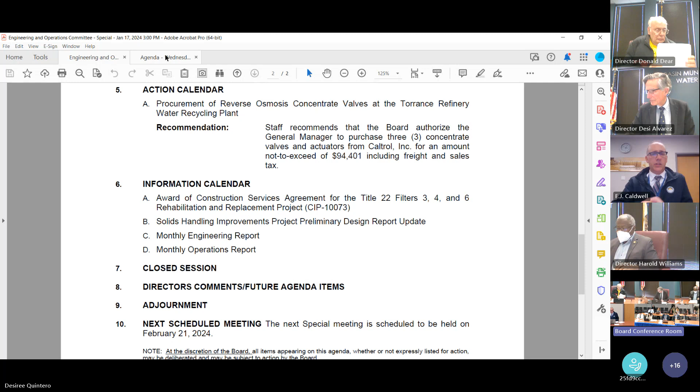So, Mr. General Manager, would you like to introduce that item? This first item begins on packet page 3, and for this presentation, we have Jason Cohn, our Operations Analyst 2. Thanks, EJ. Good afternoon, directors. You may turn to page 3 of your packet if you'd like.

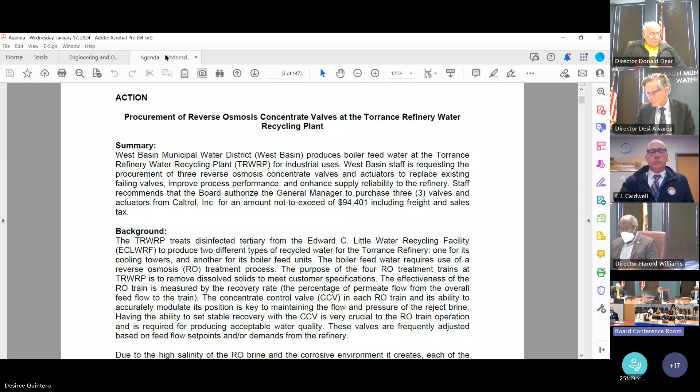The Torrance Refinery Water Recycling Plant treats the disinfected tertiary effluent to produce 2 types of recycled water for the Torrance Refinery: one for their cooling towers and another for their boiler feed units. The boiler feed water requires use of a reverse osmosis treatment process, and the purpose of the 4 treatment trains that compose that process at Torrance is to remove dissolved solids to meet customer specifications. The effectiveness of the RO train is measured by the recovery rate, the percentage of permeate flow to the overall feed flow to the train.

The concentrate control valve (CCV) in each RO train, and its ability to accurately modulate positions between 0 to 100%, is key to maintaining the flow and pressure of the reject brine. Having the ability to set stable recovery with the CCV is integral to RO operation and is required for producing acceptable water quality, various set points based on refinery demand, and the regular cleaning process of the RO trains.

Due to the high salinity of the brine and the corrosive environment it creates, each of the 4 concentrate valves and its accompanying actuators are extensively corroded. The CCV of RO Train 2 failed towards the end of September 2023, and without it, the RO train is inoperable. With RO Train 2 offline, operators are unable to perform proper cleaning of the remaining RO membranes, which in turn impacts product water quality.

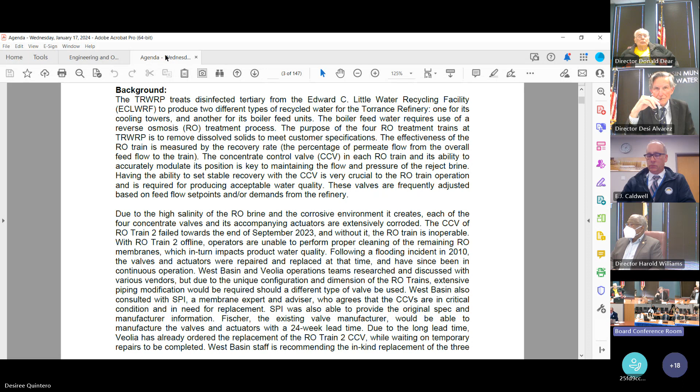Following a flooding incident in 2010, the valves and actuators were repaired and replaced at that time and have since been in continuous operation. West Basin and Veolia teams researched and discussed with various vendors utilizing a different type of valve than the existing one, but due to the unique configuration and dimension of the RO trains, extensive piping modification was required for that. West Basin also consulted with SPI, our RO membrane experts, who agree that the CCVs are in critical condition and in need of replacement. They were also able to provide the original spec and manufacturing information.

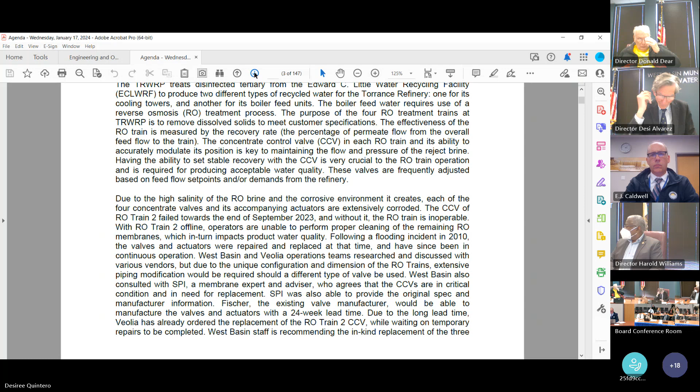Fisher, the existing valve and actuator OEM, would be able to manufacture them with a 24-week lead time. Because of that, Veolia has already ordered the replacement of the RO Train 2 CCV while waiting for temporary repairs to be completed in the meantime. West Basin staff is recommending the in-kind replacement of the 3 other concentrate valves to mitigate the risk of production loss and inability to meet contractual demands. In-kind replacement will facilitate a quick and efficient changeout and will remove the need for pipe reconfiguration and ancillary purchases.

Staff solicited a quote from Caltrol Inc., the only distributor of Fisher valves, included as Attachment A on page 6 of your packet. The total cost of 3 Fisher sliding stem valves and actuators is $94,401. Because Caltrol Inc. is the exclusive independent representative for Fisher products, sole source procurement is recommended per the West Basin Administrative Code, section 5-2.103, subsection F2. The sole source letter from Caltrol is included as Attachment B, packet page 13.

And with that, I'd like to read the recommendation and answer any questions you have after: staff recommends that the board authorize the general manager to purchase 3 concentrate valves and actuators from Caltrol Inc. for an amount not to exceed $94,401, including freight and sales tax.

Thank you. That concludes the report. Director Williams, do you have any questions? I'll have a question for the general manager.

Is there any other option? We believe that this is the best option, and it's important to note that it's clearly stated in the fiscal impact in the report that under the new Torrance Refinery agreement, funds for this have been secured. Thank you.

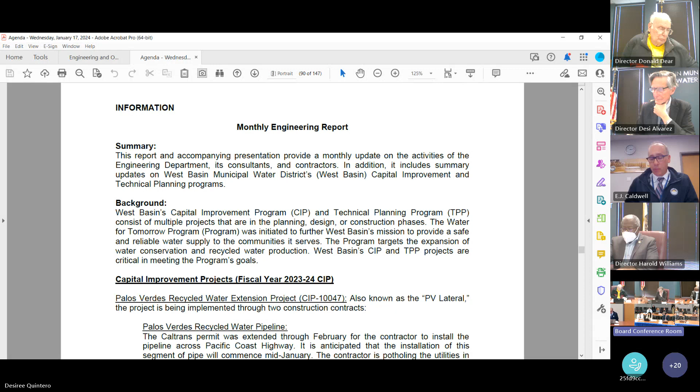But with that, Mr. General Manager, would you like to introduce the engineering report? Yes, thank you very much, Mr. Chairman. As you mentioned, the item before you is item 6C, our monthly engineering report. I'm going to hand it off to our Executive Manager of Engineering Operations, Mr. Barkov Nasrallian, for this presentation, along with our fabulous engineering team. Thank you, EJ.

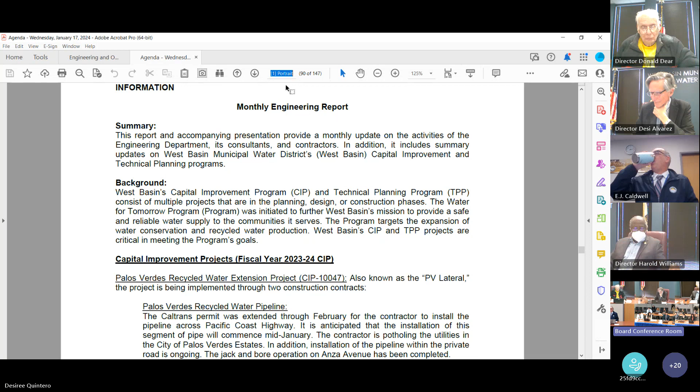Board members, the monthly engineering staff report starts on page number 90. You'll see on the staff report there are some updates on several projects, but we have a presentation to go through key projects today. Three in particular we want to run through some slides for, but I want to point out that the descriptions on packet page 90 and 91 have one change on the Nash Street lateral project.

We had a meeting with the construction team yesterday, and the connection to the 42-inch pipe in El Segundo Boulevard has been moved to January 22nd to start initial activities on the connection. There are still some items that we are waiting for them to submit, so that date has changed from what's written here in the staff report. Moving on to the presentation itself, that starts on packet page...

Let's go to packet page 96. We start off these presentations with a look ahead on some key items that might be coming into the E&O committee next month.

We want to come back to the committee with some options for the DCS system improvements. We've discussed potential options in the past. This is a very critical rehab project for the recycled water operation.

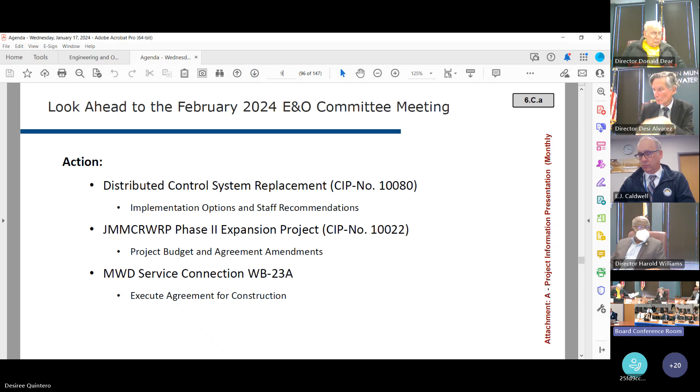Please follow me to page 98. I'll start with the construction schedule. This is for the pipeline extension. There hasn't been any changes.

We're in the process of moving through the city of Torrance and also now into the city of Palos Verdes Estates. There are multiple locations on the construction that is ongoing, and there's a lot of canvassing happening depending on where the construction is. Right now we're still looking at the original schedule, with completion later this year in the spring.

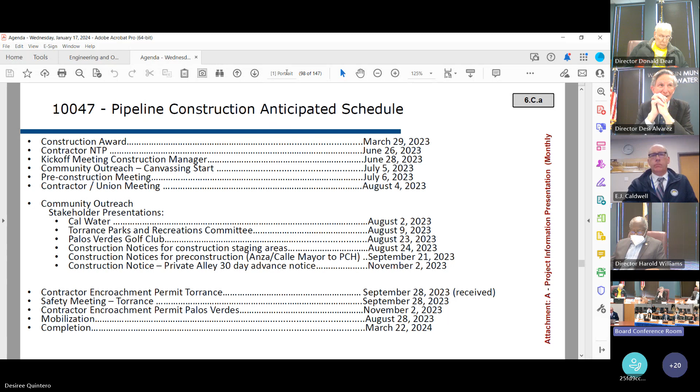Please follow me to the next page. This had a cutoff on the dates and guidelines we utilize to get this information, as of January 2nd. As of that day, we had spent 164 calendar days. We just got our first invoice, and it's still under review. Right now we're up to date on getting all the RFIs and submittals turned around very quickly.

Into the next page, please. These are some photos of the construction for the jack and bore at Anza Avenue. The operation has been completed and the street has been restored. This particular construction took approximately a few weeks, and they were able to complete it around the Thanksgiving week.

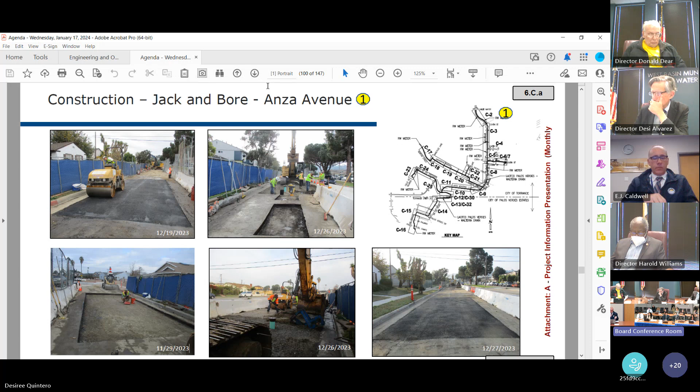Into the next page, please. These are also some of the other constructions going on at different streets. Number 2 is basically the same location or proximity, where a pipeline is being installed on a private alley for which we have an easement. That private alley helps us go from the city of Torrance to Palos Verdes Estates. That construction work also took place over the last month and has been completed.

The picture with number 3 shows the starting of the Torrance Utility Road to get the pipeline lined up for directional drilling, for which we actually had a field meeting today to go over the details of what's coming in the next weeks for the directional drilling on Torrance Utility Road.

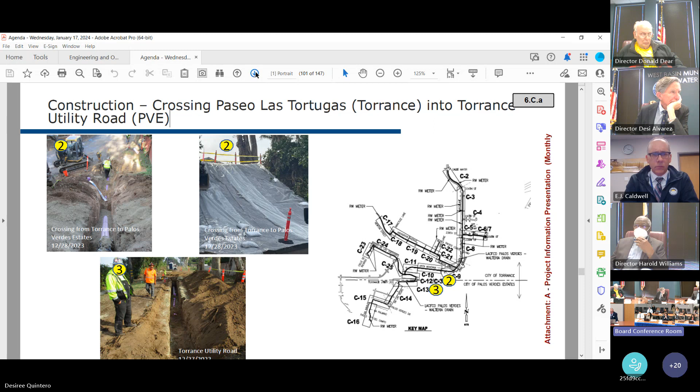Now I'm moving into the slide with the crafts identified for this particular pipeline project. As you can see, there are a few tiers that will be utilized, and some are already being used. Right now the tiers or fields being used are mostly laborer, operating engineer, and surveyors. Surveyors took place a little earlier, but throughout the installation of the pipeline and other facilities as part of the project, these tiers do come in.

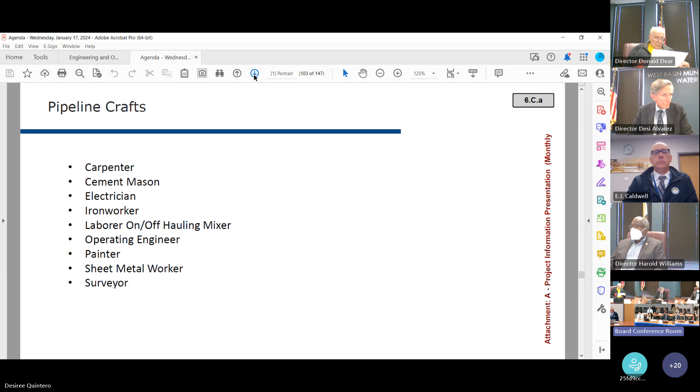For example, once we go into the master meter, you will see the electrician coming in place, and that will help on shaping out the numbers for the PLA. You can go to the next page to see a summary of where we are as of now.

This was for the report from November. Basically we were still below on tier 1, the local tier of PLA goals, at 13.3% versus the 30% goal we're trying to achieve. At risk is still low, trying to build up. The apprentices number was being successful, and as the project has advanced, these numbers have become greater and are in the process of being met.

Because of the time it takes to publish this information and get the monthly reports, there's always a little bit of lag from what we're reporting from previous months. So these are months where we were moving on to the pipeline project construction areas, and there's still a lot of tiers that haven't been shown in these summaries.

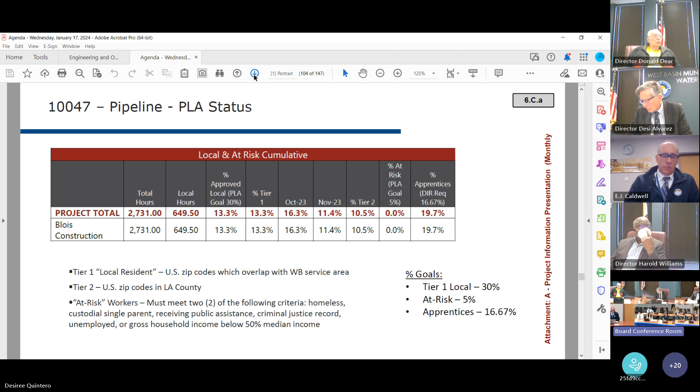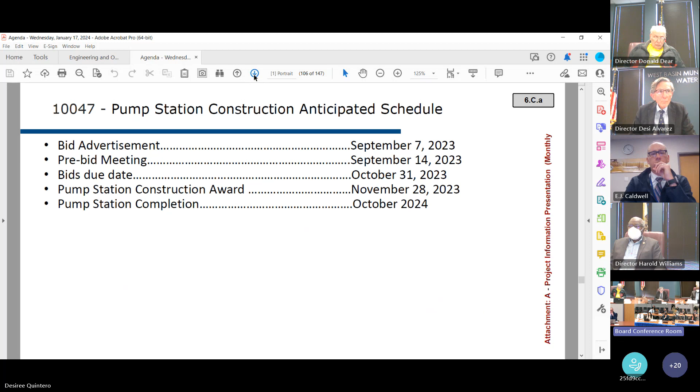For the pump station, we have awarded it. We went through the contractual procedures and those have been completed. Now we are just completing final conversations with the city of Torrance to make sure we wouldn't be stuck trying to get a permit. Those conversations are checking out, confirming we'll get the permit and be able to issue the notice to proceed to the contractor, which is coming by the end of this month. To the next page, please.

This right here is a summary of the budget that has been approved. Tomorrow the communications committee is going to present on the construction outreach done for the project, which has been extensive. We've had additional requests by cities and other stakeholders for presentations at various times, plus additional canvassing and release of information, which are factors resulting in an additional cost increase for communication outreach.

We still have the pump station. We've had several conversations with members of the public who had questions or issues, addressed by our communications outreach team, Mercado Communications. They've been doing a very good job communicating quickly, responding to any question a resident or stakeholder had, and reporting back to us so we can help get responses back. So yes, there have been questions and comments of all sorts, but our communications outreach has maintained the conversation with residents and kept them informed. They have been pleased with what we are doing.

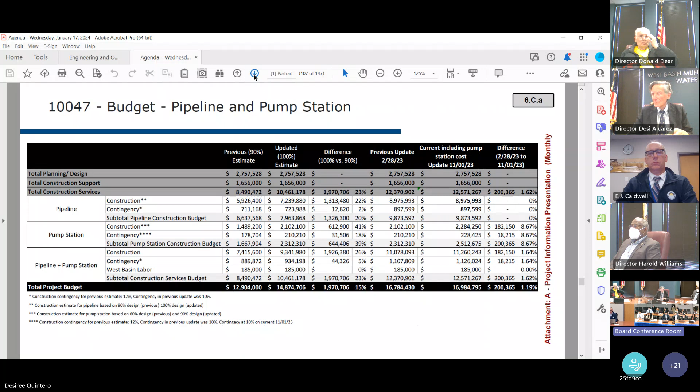Okay, and I think that was the last slide. That concludes it, thank you, Rob. Thank you, Veronica. Next up, we have a brief update from our engineer, Camille Castillo, on the fill station.

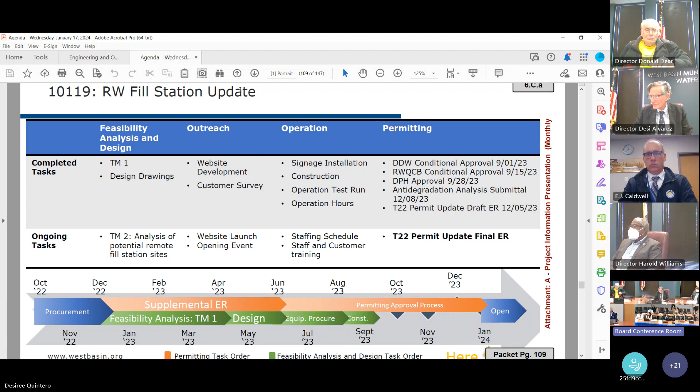As a reminder, we submitted the anti-degradation analysis last month in December with the help of Woodard and Curran, who helped prepare it. We have not received any response from the Regional Water Quality Control Board just yet. We expect to by the end of the month. In the meantime, we are working with Woodard and Curran to develop our Title 22 permit update.

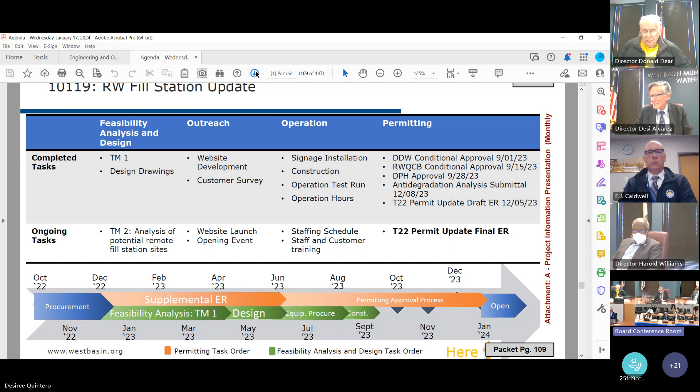So we received the draft and we are currently reviewing it, and we have a comment workshop scheduled for next week. So on the next packet, page 110, you'll see that the next steps are awaiting the Regional Water Quality Control Board response, and if they do approve, then we'll be able to move forward to scheduling an opening day.

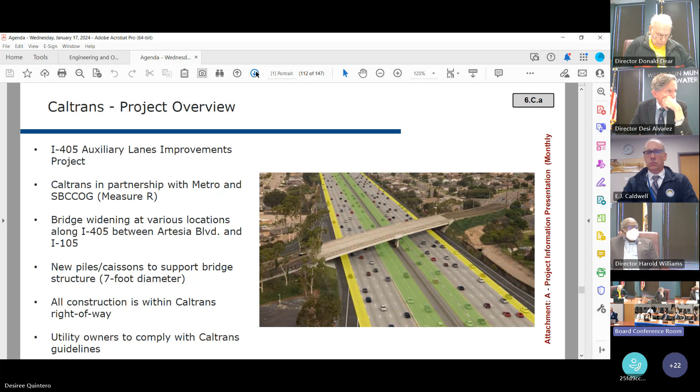Both of the encasements will be on Marine Avenue where the 405 crosses. All of the construction will be in Caltrans right of way, however the traffic control will leak into the right of way of Redondo Beach, Hawthorne, and Lawndale. West Basin is responsible for the excavation, the installation of both encasements, the restoration of the street, and traffic control. Next slide, please.

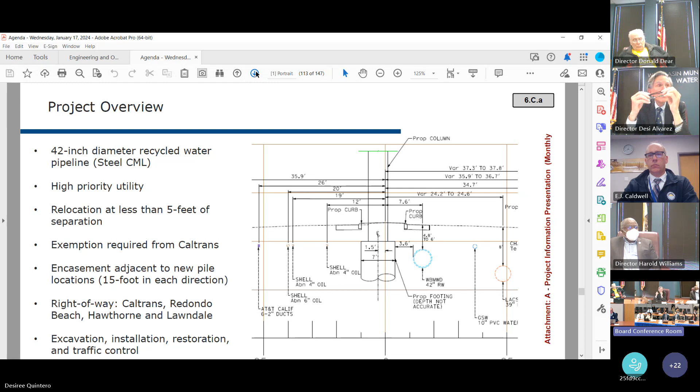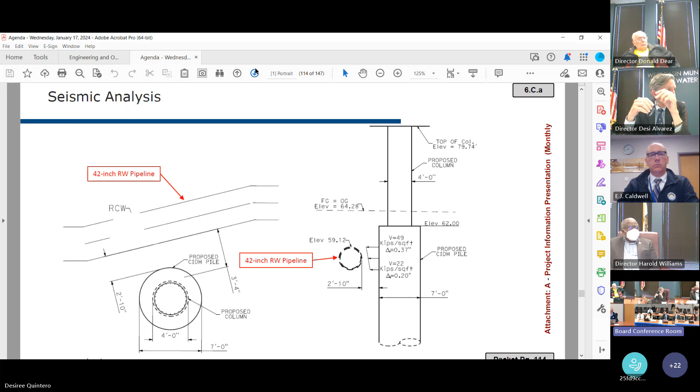On the right side, we have a depiction of the seismic analysis. We can see HDR calculated that a maximum deflection near the top of the pipe to be 0.37 inches, and a minimum deflection of 0.20 inches. Next slide, please.

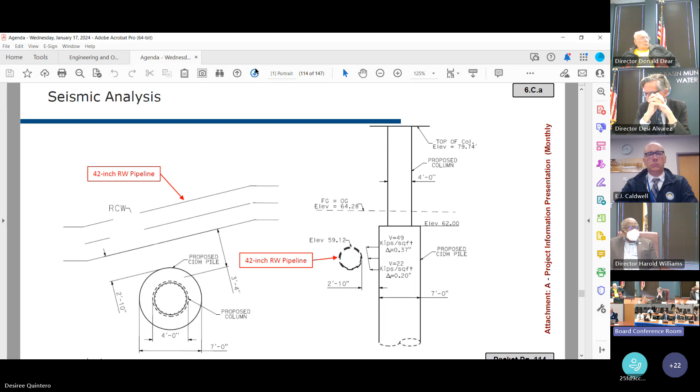Tetra Tech has completed the preliminary design. We submitted a waiver package for the relocation to Caltrans on January 2nd, 2024, which included an exemption letter, application, and preliminary plans. We expect a 30 to 60-day review process from Caltrans. If approved, the next steps will be to finalize design, complete the construction bid package, solicitation, award, and construct.

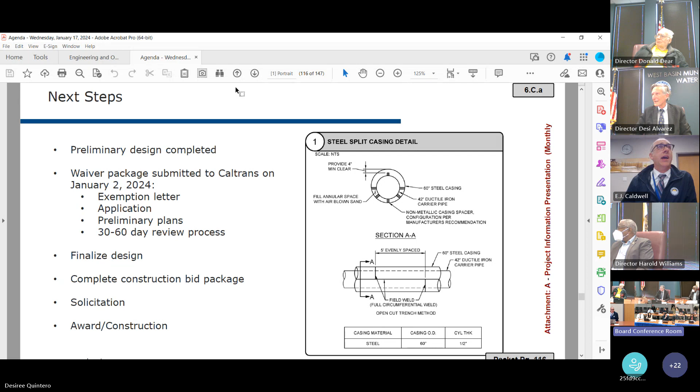One thing the general manager forgot to mention, and why we moved this item up, is we wanted all the interns to have an opportunity to present to the board. Since he is moving on, and congratulations, he's taking advantage of his last days here to make a presentation to the board, and we appreciate it. Okay, very good. Thank you, and thank you very much, Vincent. This is the second of our interns to present at committee, so we're excited to see the rest.

The remainder of the presentation for the engineering staff report covers the project budget updates as well as the contracts. Director Dear, any questions? No. Director Gray? No questions. Thank you, Chair. So we can move on. If there are no questions about the project budgets or the contract list on packet page 123, that concludes this staff report.

Do we have any other questions? No, thank you. Director Dear? No. Director Gray, any other questions? Okay, if not, then we will move on to item 6A.

That's award of construction services agreement for the Title 22 filters 3, 4, and 6 rehabilitation replacement project. Mr. General Manager. Yes, thank you very much, Mr. Chairman. This item will be brief and will be presented by Barca Masurlian, our Executive Manager of Operations.

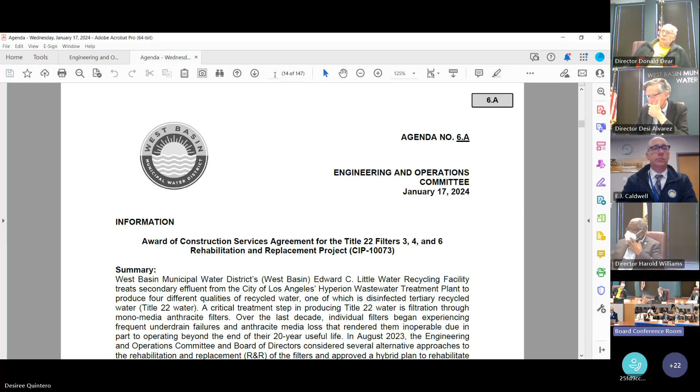Thank you, EJ. Directors, late last year the Engineering and Operations Committee considered several alternative approaches for the rehabilitation of our filter basins - there are 14 of them. We presented three alternatives: one was to rehab all of them, another was to rehab 3 and then do the rest in sequence later, and the third was a programmatic approach.

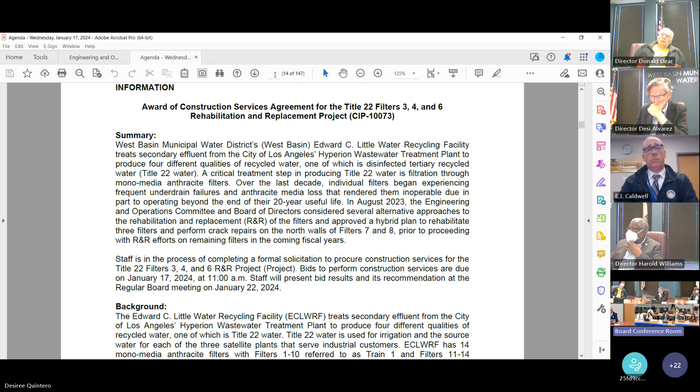The committee selected a hybrid of two of the alternatives presented and approved us proceeding with soliciting bids for the rehabilitation of 3 filters, with some crack repair improvements on one of the walls. So on December 6, we issued a bid solicitation, and the bids were due this morning.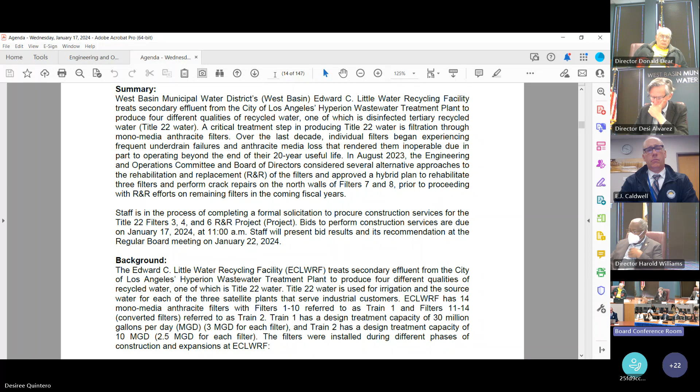As of when we posted this agenda, bids were due this morning. However, we've since decided to postpone the bid due date to possibly encourage more bids to come in. So the new bid due date is January 31st.

While initially the purpose of this staff report was to give you an update before we bring the award recommendation at the January board meeting, we now propose bringing that back in February to committee first with all the bids, and then to the February board with the committee's approval. No action is recommended at this point with this reporting.

Okay, any questions for the audience? No, thank you. Director Dear, Director Gray?

So how many bids came in today? We decided to postpone the bids. Or would you postpone them completely? So we did not receive any. Yesterday, we postponed it, because you anticipated only a few.

There were several contractors that attended the pre-bid meeting. One of the things we offer whoever attends is that if you want to go back and visit the site, you can ask us, in a way to encourage them to put in a bid. So one of them reached out and we took them out to the site. They've indicated that they have more questions that we need to answer.

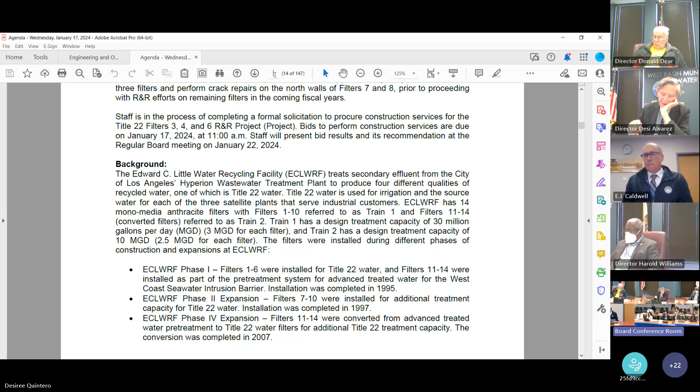Thank you. All right, we have one other item, which is the solids handling improvement projects preliminary design report. Can we do that in 10 minutes? We shall do our best.

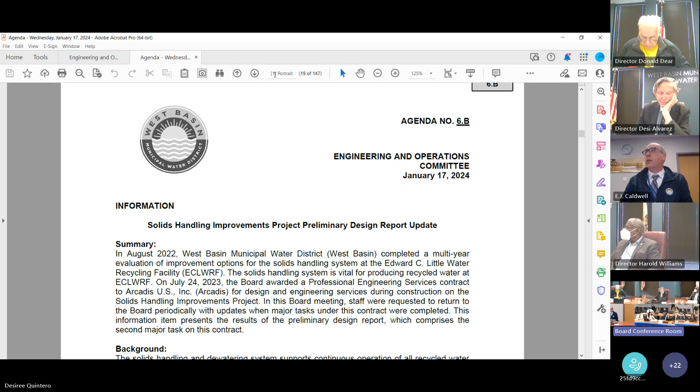I know John Benner does an amazing job of presenting these items, but why don't we give an overview? Clearly there's a great deal of information in the packet as well as an excellent presentation, but why don't we throw it over to you, John? Do your best with the time, and we can obviously engage this conversation further at the board meeting if necessary.

Afternoon, directors. So the update on the solids handling project is on page 19, but we'll start the presentation on page 26. By the way, you also have 2 committee members here, so even if you have to leave, we can carry on without you.

But I'd like to, at least on this one, I want to hear it. Of course, of course. When I did a dry run of this presentation, it was 20 minutes. Okay, we haven't got time, I think.

But if we go to packet page 27, these are the topics we're covering. So I put a summary at the start here because the presentation is going to be pretty long, but I can effectively summarize a couple of the main points here.

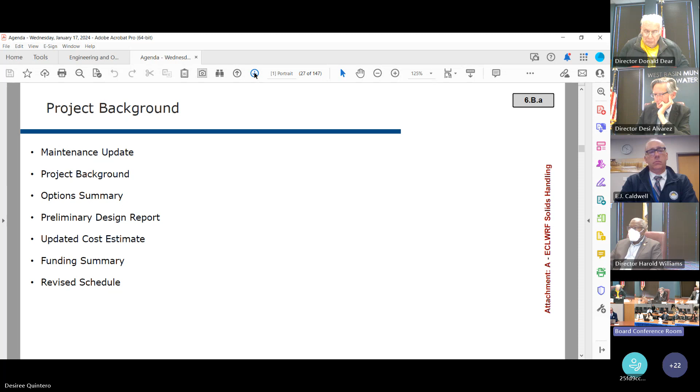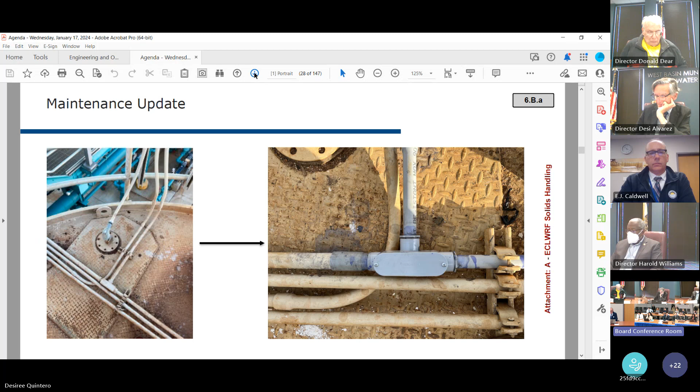The first section, the first 5 slides, is a maintenance update. Effectively, this is showing the work that Veolia has done since the condition assessment report came out in November of last year. If you remember, that condition assessment report had some items that required further maintenance, so Veolia have gone through and rectified quite a few of those issues. Some images there show the work they've done in the last couple of months.

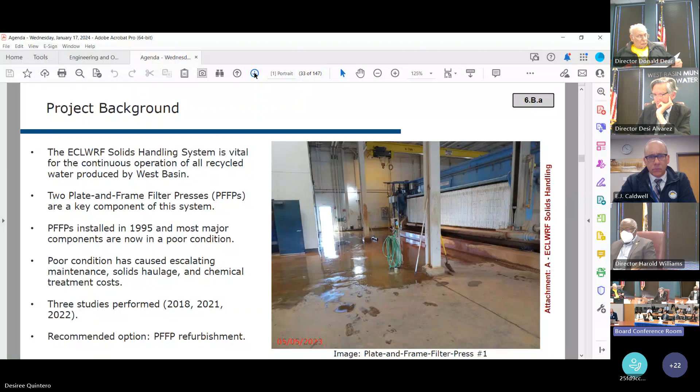The project background section is the usual section where we talk about the fact that these presses need rehabilitation. They were installed in 1995. Most of the ancillary equipment installed then has also not been replaced. They're well beyond their useful life. We conducted a number of studies over the years, and those studies have shown ultimately that refurbishment is the most cost-effective option. The next slide just shows what it is we're planning to refurbish.

I've been over this before, so we can skip past this. But effectively, we're doing a mixture of replacement of some items and components that failed or are well beyond their useful life, refurbishment of some other components, and then retaining some components that don't need to be replaced.

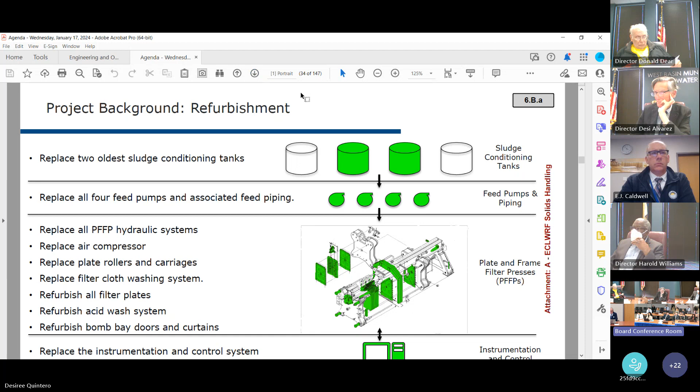In 2018, the feasibility study that went into a pilot study recommended replacing the presses with a centrifuge system. In 2021, we re-looked at the whole idea of doing a refurbishment or replacement, and looked to see whether we could just discharge directly to the sewer.

In 2022, we re-looked at those options again with new costs, and that study recommended refurbishing the presses at the current plant. The main reason for that recommendation is that when you take into account O&M costs over the next 10 to 15 years, the refurbishment actually comes out as far more fiscally responsible than replacing the whole system with a centrifuge.

In addition, discharging to sewer, the composition of our sludge meant that the ordinance-based rates were incredibly high year on year. We also had significant reticence from both LACSD and LASAN about whether their sewer system and treatment processes could actually handle the sludge we were proposing. So alternative one, the refurbishment, came out as the most cost-effective option.

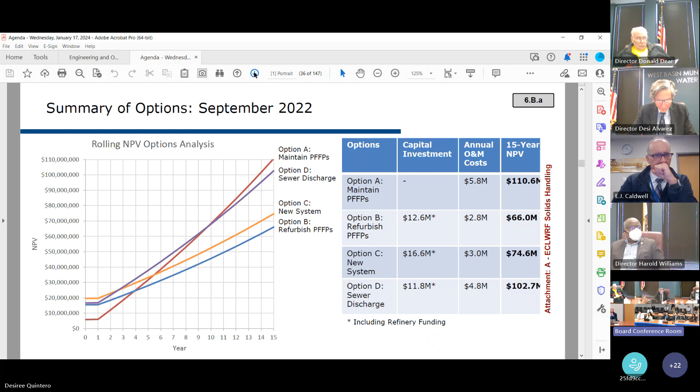Next slide. So what's happened now is that we've received the PDR, the 30% design, from the design consultant. That's the latest submittal. It's attachment B of this staff report, the first draft of this PDR, which we received on December 19th, and that had a new cost estimate included.

They've updated all of the costs on the project to current costs and included recommendations for what they recommend we include in the construction, moving some things around that I'll get onto in a moment. We've reanalyzed the other options in comparison, and the refurbishment still comes out ahead in terms of cost benefit over the 15-year period, although it has moved the return on investment from the 4.7 years we mentioned before to about 5.5 years. I'll go into, in a moment, some methods we've got to reduce that further.

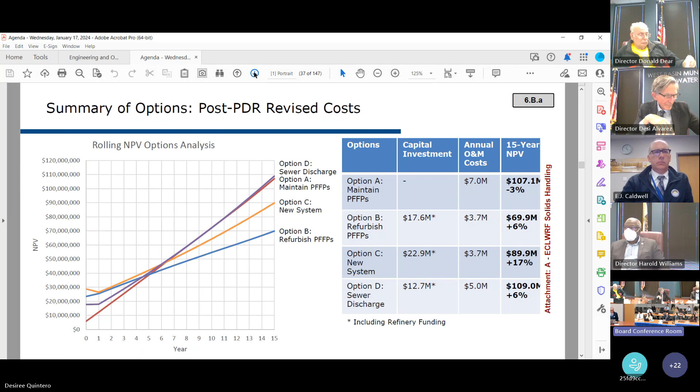Next slide, skip past the next few. The slide after this is just the design schedule - some things have moved out slightly. And then next slide is the overview of the PDR.

As I mentioned, we received the first draft in December last year. We had a workshop with the consultants last Thursday. There is scope for a second draft and a second workshop before the final submittal, but we anticipate we probably won't need that - the workshop was very productive. The PDR has given a 30% design for the refurbishment, a plan to undertake temporary dewatering during construction, an estimated construction schedule, recommendations, costs and timings for pre-procurement of materials, and a Class 4 AACE - Association for the Advancement of Cost Engineering - cost estimate of the construction.

So there are significant changes that this PDR recommends, namely that it recommends taking the presses offline for up to 10 months during construction. Originally, the plan was to take one press down at a time and put the other press in double duty. Unfortunately, this has been deemed very high risk.

The presses are struggling to cope with the current loading, and putting one press in double duty leaves us with no redundancy if that press fails while we're refurbishing the other one. It was also deemed that this would extend the construction time. So the consultant recommends in the PDR just taking down the whole system for 10 months and having the contractor operate a temporary dewatering system during that period on a fixed cost basis. This is a big change to the construction and to the way we were planning on doing this project.

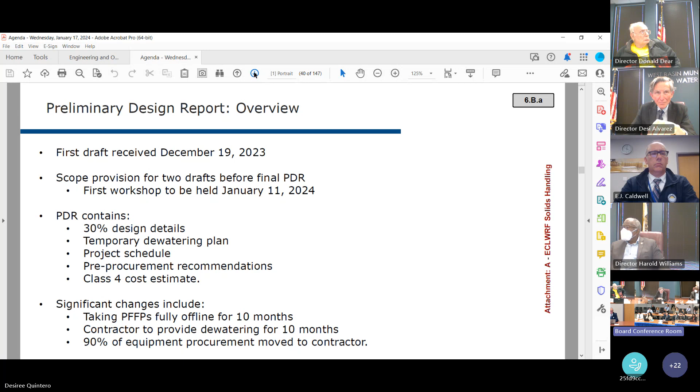We can move past the next few slides. They give some detail on the different options, why we've chosen them, how they affect the cost, but we can probably skip ahead.

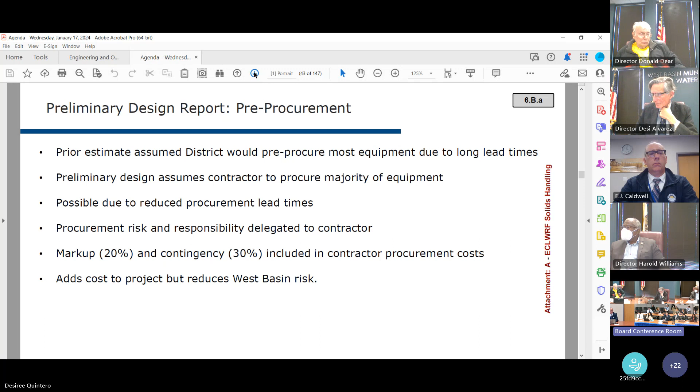This is pre-procurement. If we go to the next slide, these are the items that we are procuring. Sorry, the previous one - the previous slide is items that we're still pre-procuring ourselves. So we've still got to pre-procure these steel sludge conditioning tanks due to the lead time.

The next slide shows items that the contractor will now be procuring according to the recommendation of the PDR. There's a markup there of $490,000. Effectively, the PDR recommends the district pays an additional $490,000 to move the risk of procurement onto the contractor. So there's potential to reduce cost if we'd like to take that risk ourselves and procure those items ourselves.

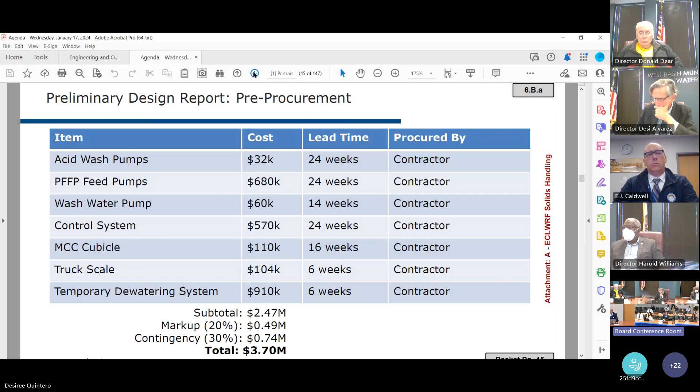This is probably the main slide here. Because of moving all of these new things onto the construction contract, the construction cost estimate has increased from 8 million in 2022 to 20 million - a significant increase. Most of this is due to the additional procurement being moved from district pre-procurement onto the construction contract, and also from taking down the presses and having the contractor operate a temporary dewatering system. We'll effectively spend no O&M to manage the presses because we're no longer operating them, so we're moving O&M costs onto the contract as well - effectively moving a lot of our O&M costs for the year into the project.

But it means the total project cost has increased from 15.3 to $23.9 million. When we take into account those O&M savings we're moving onto the contract and the refinery funding we've already received, the actual district expenditure currently sits at $17.6 million, which moves that 4.7-year ROI out to 5.5 years. Next slide.

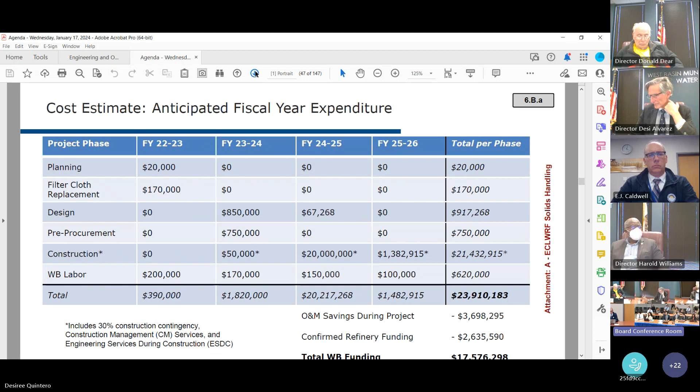This is just the same information in a table format across the years. The next slide shows the previous estimate and where it crosses, and the following slide shows the new estimate.

On the next slide, we have some cost reduction opportunities. I've mentioned the pre-procurement moving back onto the district. The main one, though, at the bottom is to secure additional external funding. So if we go to the next slide.

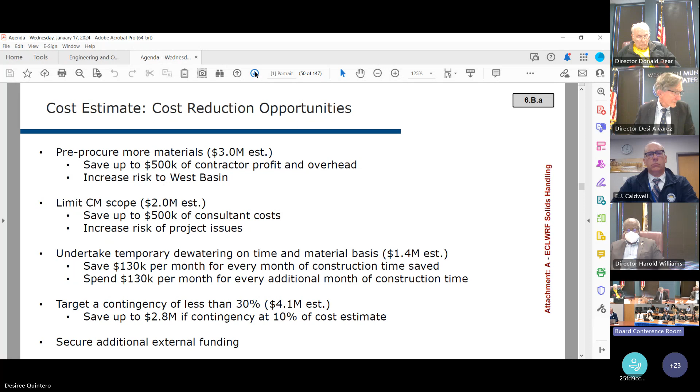The funding summary here is the main point of the presentation, really. We've received $2.6 million of refinery funding to date, but those allocations were based on prior project budgets. So with the new project budget of $23.9 million in total, we can go back to the refineries, issue letters to them notifying that the project budget has increased, and seek additional funding.

That additional funding would be, in addition, $2.7 million through the existing agreements. That takes our West Basin expenditure down to $14.9 million and brings our ROI back into that 4.7 years we've committed to. So we're looking at a potential adjusted ROI of 4.6 years, early 2028.

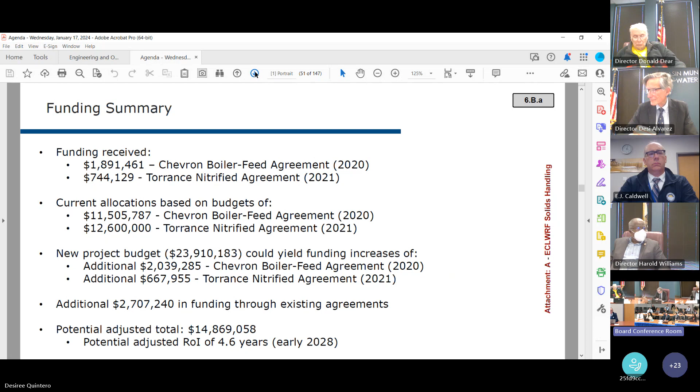And I believe, sorry, I had run over that. Yeah, the last slide is just the next project schedule, and then we're done. Hopefully I got enough information in there for you.

Okay, thank you. Director Williams? No, thank you. Director Dear? No. Director Gray? Make these quick because I do need to leave. Nothing. Thank you.

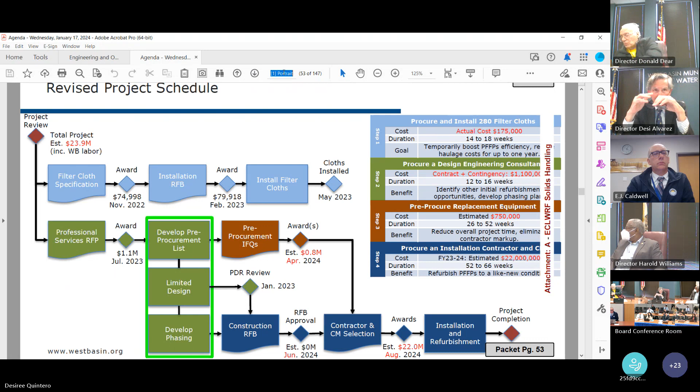We're concerned about all the issues associated with the Edward C. Little Plant and what the future of the Edward C. Little Plant is, and how much investment, and where we should be making that investment. Needs a lot of discussion.

One of the things we're looking at is that we may be financing this, if I understand the fiscal impact discussion in the staff report correctly. I understand that you think you're gonna pay back that by the operational savings, but still we're incurring debt, and that will be rolled into our long-term debt. Or is that short-term debt that you intend to pay back on the short term? What's the implication of that discussion?

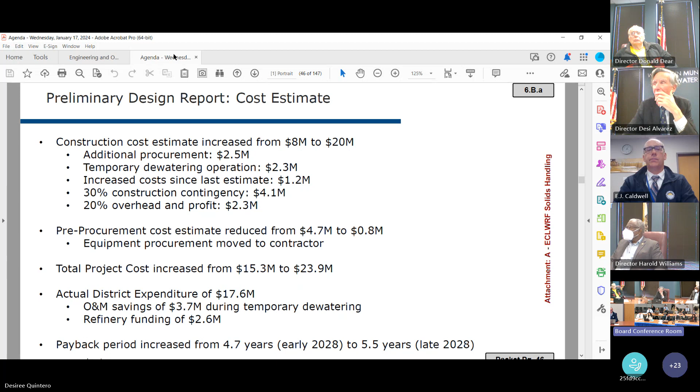But yeah, to directly answer your question, it is short-term funding, a short-term loan is what we were considering for the project, and we'll be happy to describe that in more detail.

Well, we have done short-term financing, but we end up most of the times rolling that up after 2 years into long-term financing and our long-term debt. And it continues to increase, and we're making investments in a plant that has a lot of questions associated with it and its future. So in considering that, it behooves us all to really know where the money's coming from, how much future money we may be tying up, and ultimately how that's gonna get paid for.

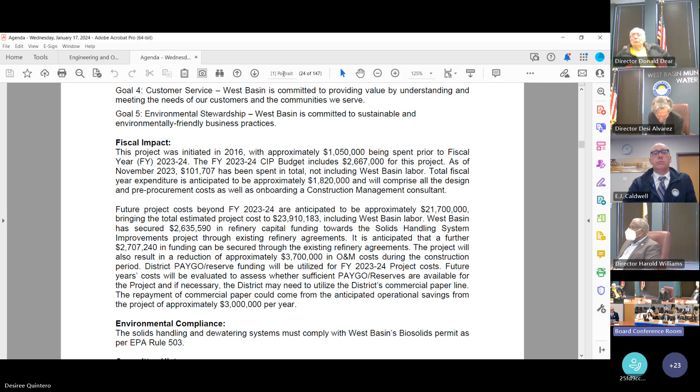With the last slide that John showed there with the different years of ROIs, the only way we could see that this project financially does not make sense would be if the City of Los Angeles will give us an MBR type of quality water within those years that we are projecting. Otherwise, the O&M cost is what we've calculated would be even higher than the project itself. You can see the number of years there.

So if there was an MBR project guaranteed to come in prior to 2030, then potentially this project may not be necessary. But otherwise, all the alternatives that we looked at, all the analysis that we did, and looking at these next few years, it seems like this project is what is most financially responsible avenue for us to take.

I appreciate all of that, but I've also seen a lot of the financial predictions, and as time moves on, the numbers change. I've never so far seen anything change to the positive. It's always been kind of in the negative direction, meaning that some of the assumptions made tended to be conservative and things cost more and we're in a worse situation than a better situation. So we do need to be very careful. But I would appreciate if you could bring back some further evaluation of that.

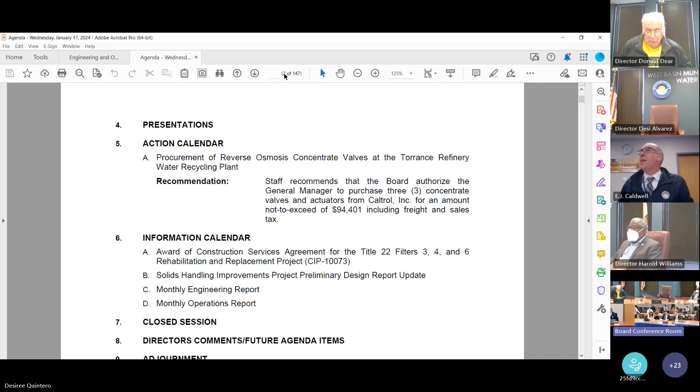Or you can continue. The last item is the operations update. Okay, thank you, everybody. I think we should go on to the next item. Yes, thank you very much, Mr. Chairman. This is our monthly operations report. For this presentation, we have our next team of operations staff led by Uzi Daniel, the manager of operations.

Seconds to change the cast. The engineering understudies.

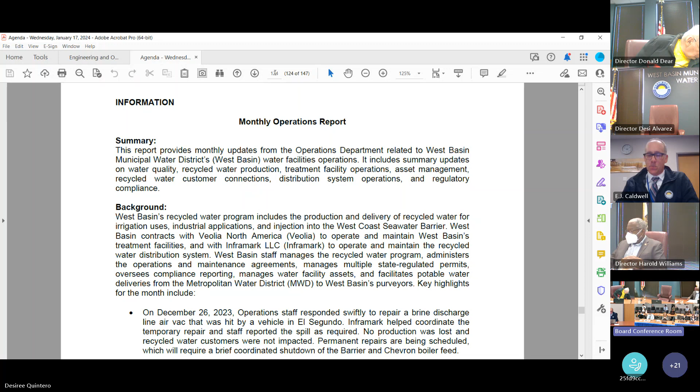We took care of some leaks. Seems like a lot of people are having fun on the holidays, hitting some of our air vacs. And we even coordinated some issues with MWD and some of our purveyors who had some concerns over water quality, brought them together with their EOC, and took care of that during the holiday season.

We continue to work on and had some good progress with Emerson. We have an aged, seasoned SCADA system, and sometimes finding the people who can repair it means bringing them out of retirement or getting them from other states. We've been working on that as well, with success and good coordination between all departments and contractors. Thank you to everyone for that.

Some other highlights, which I've mentioned a few times and may come up in compliance: we have another proprietary system, our fire control system at the plant, Johnson Controls. One issue is that it's proprietary, and they've also purchased a lot of their competitors over the years, which makes things more challenging.

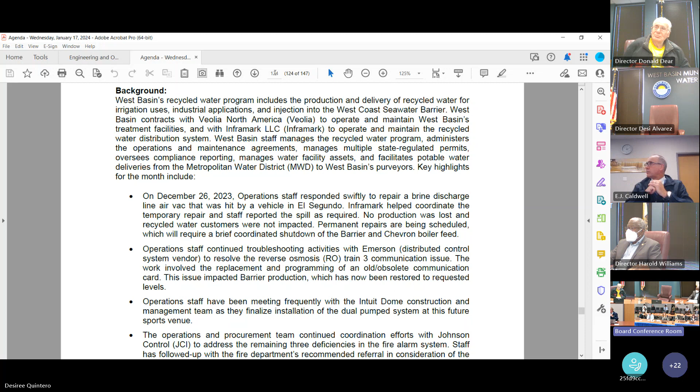We've been working closely with the fire department, using someone they recommended. We'll probably bring information back to the board on whether it's better to change out the entire system if we can't get a response. Our procurement team has worked almost 6 months with that company, and no one agrees on the terms and conditions. We'll provide more information.

We're making good faith efforts, engaging with the fire department to make sure they know we're not neglecting this. Veolia has had to do 24/7 fire watch in the meantime. The fire department involved is El Segundo.

I'll give you an example at the DLD building: our fire control system there is not proprietary, so every 5 years we can go out to bid for someone to monitor and maintain the system. That leads to good competition, and let's be honest, better customer service. We'll bring more information to the board on that by next meeting.

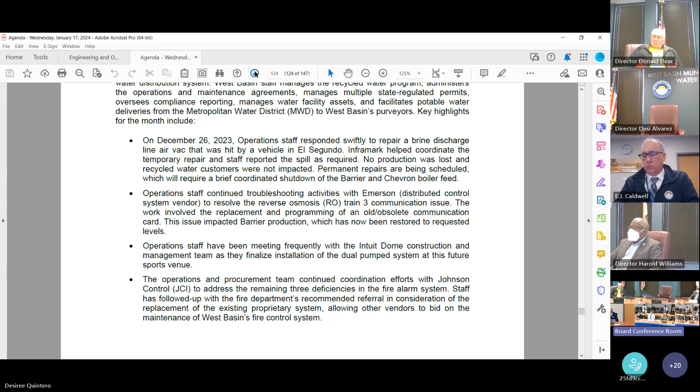In addition, we'll hear a bit more on compliance—lots of activity with quarterlies and annual reports coming up, and the new brine permit. We received the brine permit renewal, issued every 5 years, for ECL, and now JMM at Carson is up for renewal. The hearing is February 22nd, and we're submitting our draft comments today. Everything looks pretty good and standard, and that's moving forward as well.

With that, if you'd like to hear or see the brief presentation, we can continue. Please do, thank you—I'll turn it over to Suzanne, starting on slide page 127.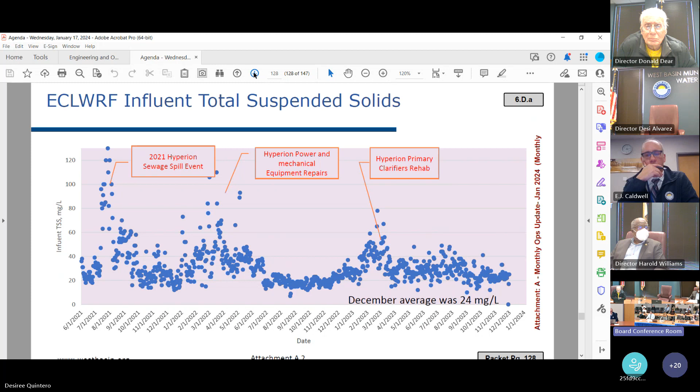Here's the beginning of the recycled water production reports. As you can see, in December we were down compared to last year as well as our budget. The main reason was the barrier being down, a continuation resulting from the November power outage. We had to resolve some communication issues, so we could not bring the barrier online for most of December.

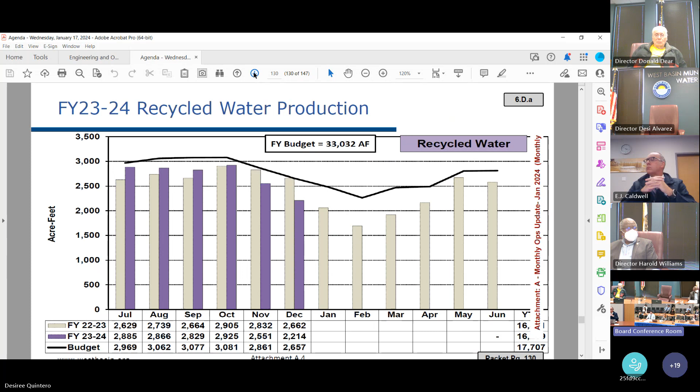Before diving into details on the different recycled water product line productions, please go to the next slide for a bit more detail. As I said, the main reason for the big gap in production was the barrier—we were down compared to last month, and compared to budget we were 61% off. Other things to highlight: the JMM boiler feed is in the middle of its big turnaround.

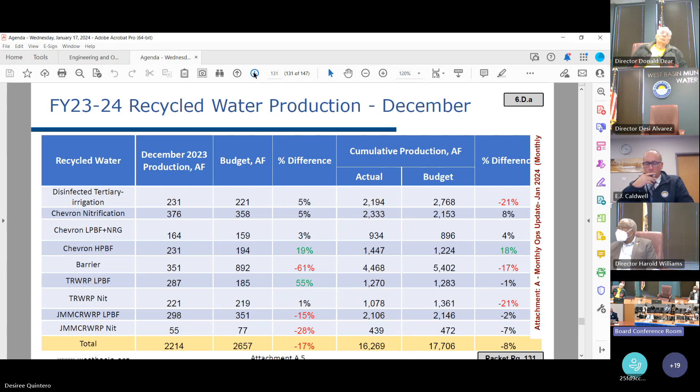Unfortunately, they did not inform us earlier, but we just got notice that this mini turnaround, or major turnaround, will be going on for another month. So we will see below budget numbers continue through January and February. For Torrance, they just completed their big turnaround, so they're ramping up production.

Again, this is just another comparison to last fiscal year, and again, barrier was the major gap in production this past month.

I'll turn it over to Jamie. Good afternoon, directors. Very busy month for environmental compliance activities. The most important items are the brine permit renewal inspection at Carson, which is getting ready to renew our brine permit, meter calibration reports we have to turn in to LA County Sanitation District, our big fees for all of our state water resources permits are due, and we have quarterly surcharges also due.

Some things a little out of the ordinary: we had the response to the fire alarm deficiency, which Uzi mentioned, that also went to the fire department. Our notice of public hearing was posted in the Daily Breeze for the upcoming public hearing for the Carson brine permit. Slow month on samples, a little under 500.

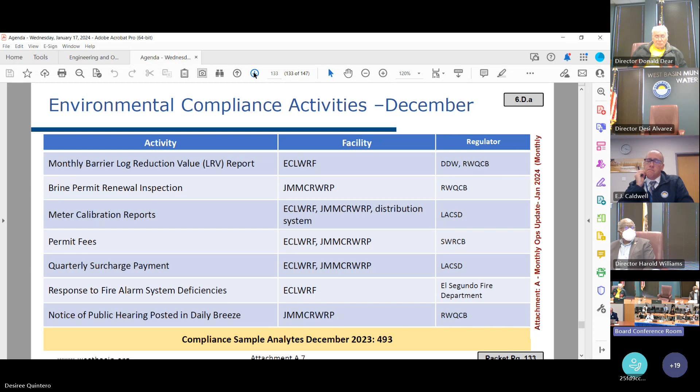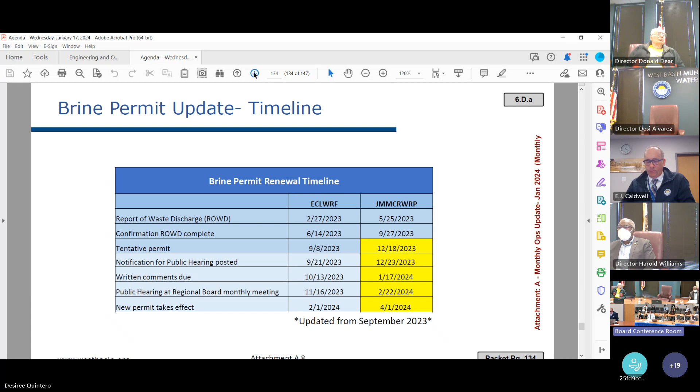This is just an update from the last time we showed this in the package. This is a timeline of the Edward C. Little brine permit versus the Carson brine permit. With Edward C. Little, we are coming upon our implementation date, our effective date of February 1st, where we're just getting started. With Carson, we received the tentative permit last month and posted the public notice hearings. Written comments on the tentative draft permit are due today by 5 o'clock. As Uzi mentioned, we'll have the public hearing at the regional board offices on February 22nd, with the new permit taking effect April 1st.

Directors - yes, on the hearings, how often do our staff attend? We attended the last one. The permit cycle is every five years, so when we reach a tentative draft of the permit, we have to attend a public hearing - it's just a requirement of the permit process.

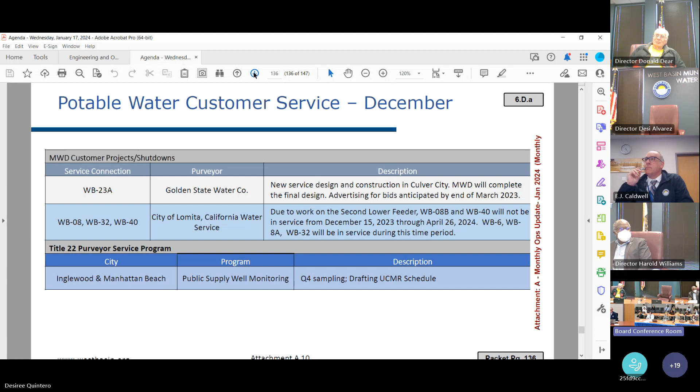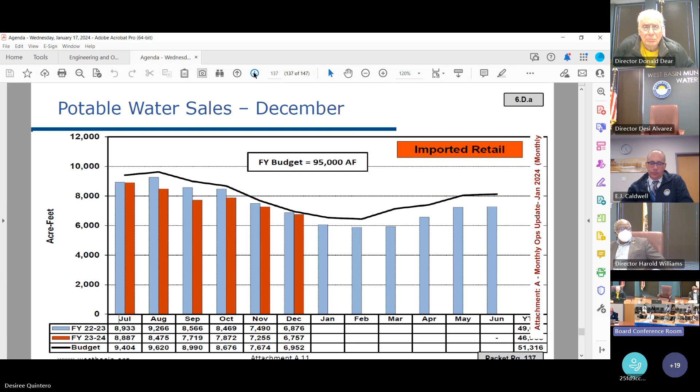This is our update for the potable water sales through December of last year. The demand was 6,757 acre feet for the month of December, very close to the budgeted amount of 6,952 acre feet. So a slight difference of 195 acre feet from our projected budget amount.

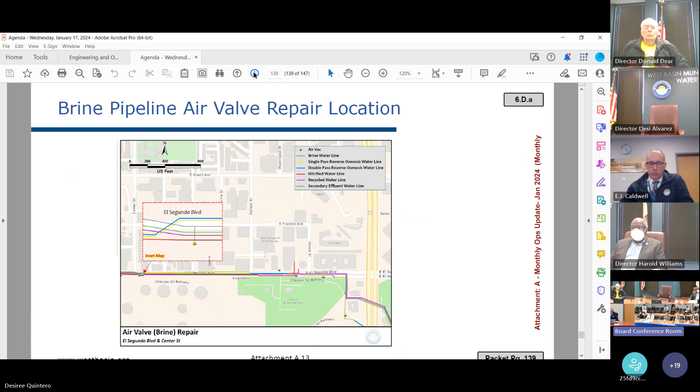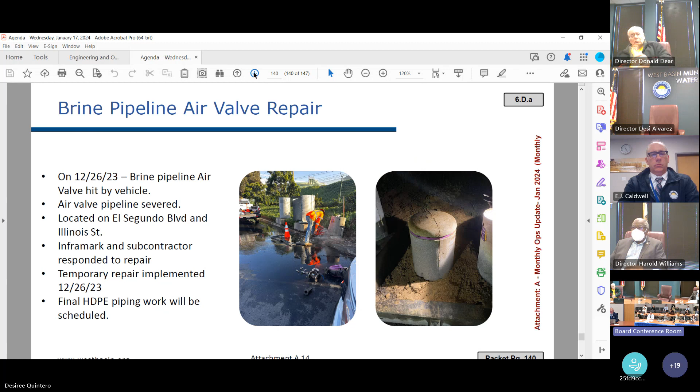Next slide. This shows a couple of photos of the air valve after it was hit on December 26th. As mentioned, the pipeline was severed from the 2-inch line that serves the air valve. Inframark and our subcontractor responded to the repair and were able to implement a temporary repair with compression fittings to stop the leak. But since it's an HDPE pipeline, we need to schedule a separate contractor to come back and complete the final repair, since the lines have to be fused together. We're anticipating scheduling that the first week of February to complete that work.

That completes our report. We'll be happy to answer any questions.

Very good, questions? Anyone online? Director Gray? No, thank you. Thank you. Okay.

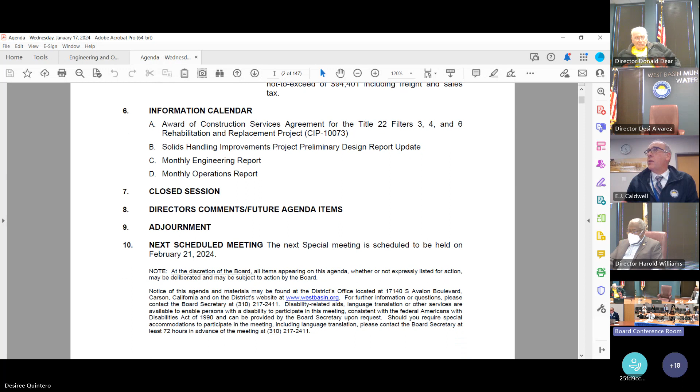Carry on. Right, that concludes our information calendar, Mr. Chairman. I want to say thank you to staff, both engineering and operations, for moving through those items. That was a lot of information presented fairly quickly, so thank you very much to the committee for your patience as we move through that. We're here to answer any questions, but that brings us to closed session items, which we have none today.